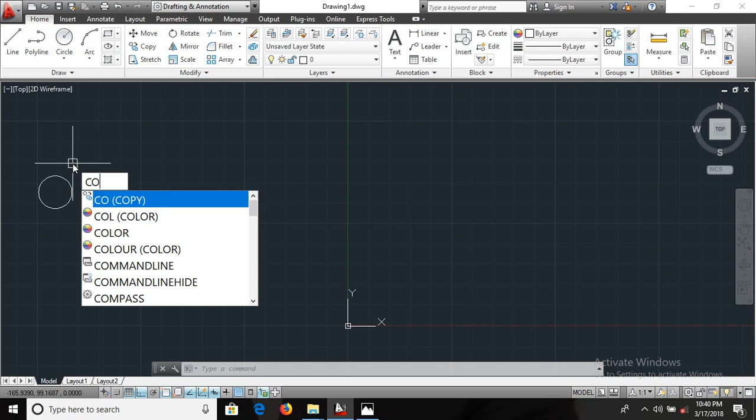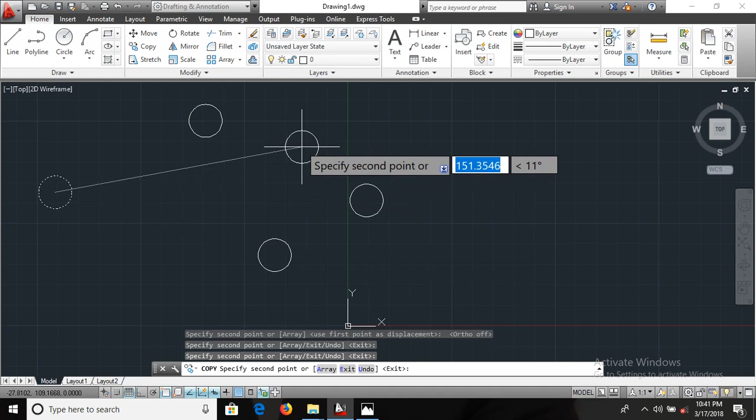The same circle I want to take a copy of. How do I take a copy? That's very simple. I'm using the copy command, cp command, or we can use co enter also, no problem at all. I'm selecting this command and enter. Now it's asking the base point, so I need to specify the base point, meaning from where we are taking the copy. From this point I want to take a copy, so I'm clicking that point. After that, where I want to take this, I'm turning off F8. So now ortho is off, and I'm clicking this point. Then the object is going to copy onto the location where you clicked. This is one way we take the copy, or otherwise we can do it by a different method also.

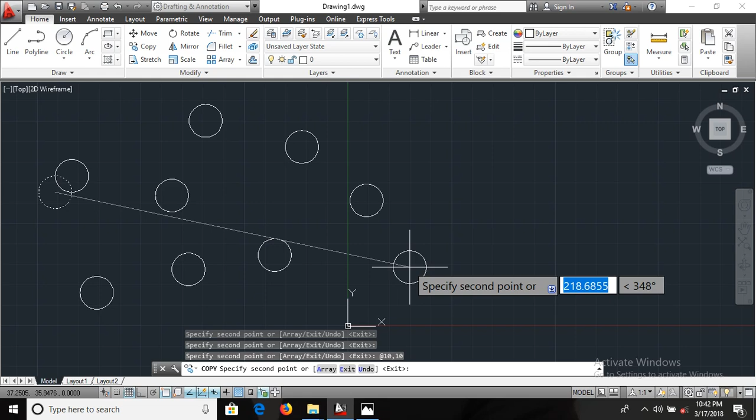We can use coordinate values also, either relative, polar, or Cartesian. It doesn't matter, so I'm taking Cartesian now. For suppose I give 10 comma 10. From that origin it takes 10 comma 10, and the circle will go and copy at that location. I just click enter, then we can observe there. That's very simple to do. This is the way we take the copy command.

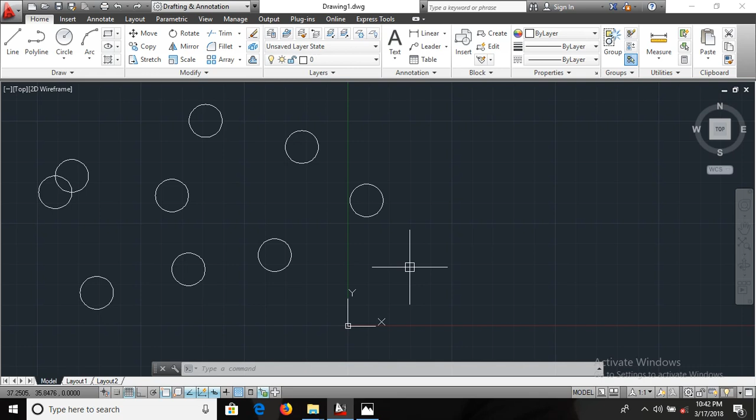And we have another thing also, move. What is the exact meaning of the move command here? That's very simple, friend. So m enter, the same thing I use for copy, and the same way we can do move also. But move is nothing but cut, so it's moving that object from that location to another location. I'll show it to you with an example.

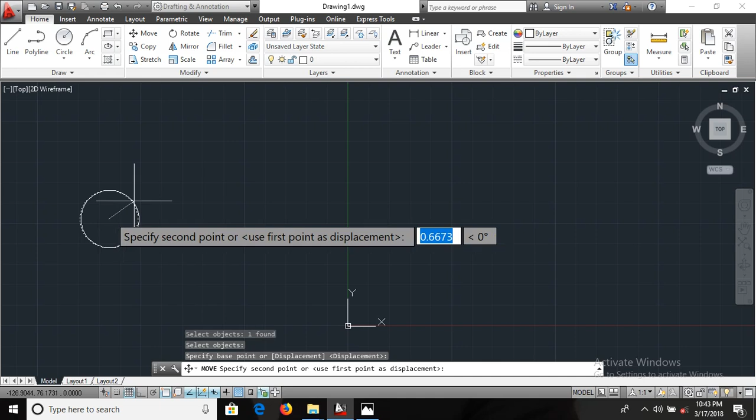I make a circle here, like this. I want to move this circle from this location to another location. So how do we do that? We take the command that is move, and I'm selecting this object and enter, and specify the base point here, and I'm moving this. Yes, it's possible to move. Click there, then the move command is done. So this is called move.

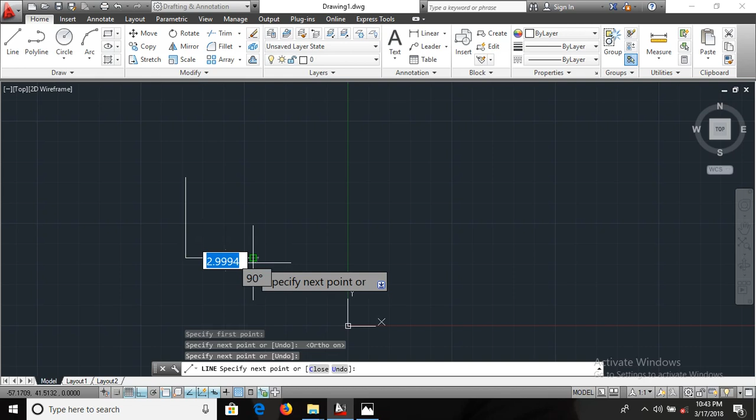I'm going to discuss the next command, which is called mirror. For suppose I'm drawing a line like this. Now I want to mirror this object onto another location, so mi enter, and I'm selecting this object, enter, and specify the first point of the mirror line, specify the second point of the mirror line. What happens, friends? Now the mirror is here, and that's the reason this object is automatically mirroring on this side.

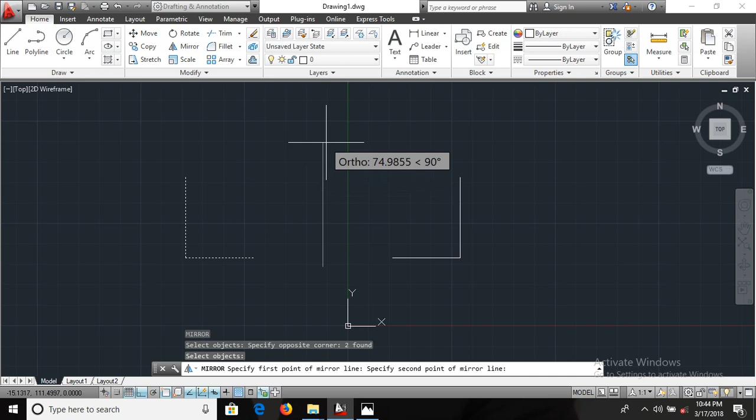Now I do it once again. I use mirror, enter, specify the first point, specify the second point, yes, no. Now you can observe. So this is called mirror, friends. Now let us see the next one.

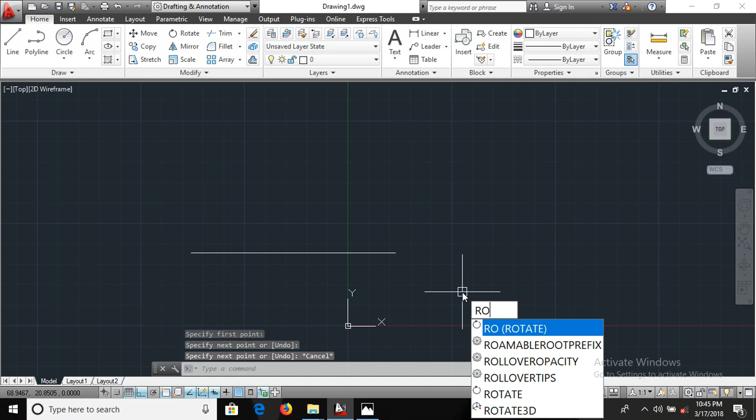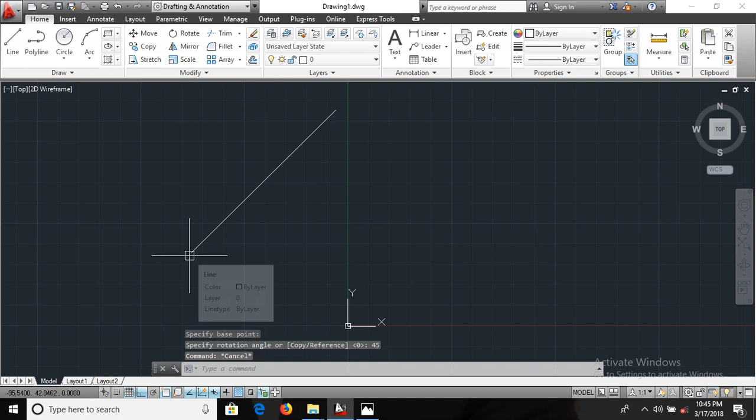Another command I'm going to discuss with you is rotate. L enter, I take a line here. This line I want to rotate by 45 degrees of angle, so it's possible. RO enter, select this object, enter, select this object, then after the base point, from this base point I want to take 45 degrees of angle. So I give the base point here and 45 degrees. Then it rotates by 45 degrees of angle.

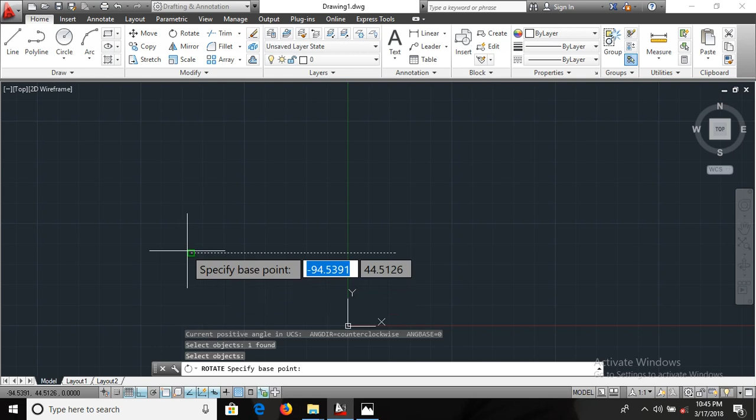But observe, friends, I don't want to do it just that way. I want this object, and I also want to copy this object within a 45 degree rotation. How is it possible? Very simple. I'll do that: RO enter, select this, enter, base point, and here, friends, I'm using the copy reference, so that's why copy.

Now you can see this 45 degrees of angle. The object is stable over here and it's taking 45 degrees of angle. So this is very simple, right? This is what we are doing with the rotate option here.

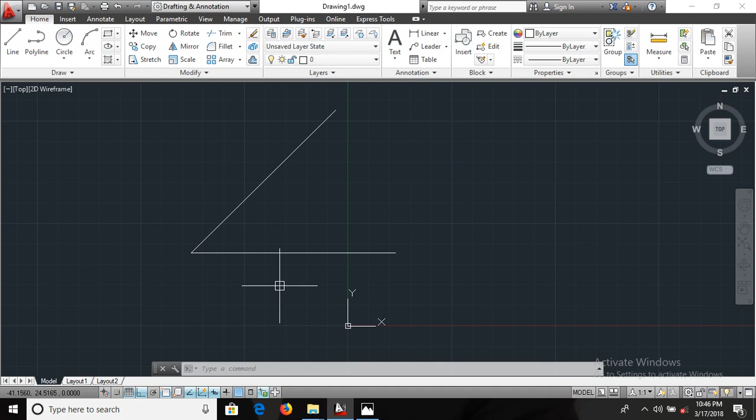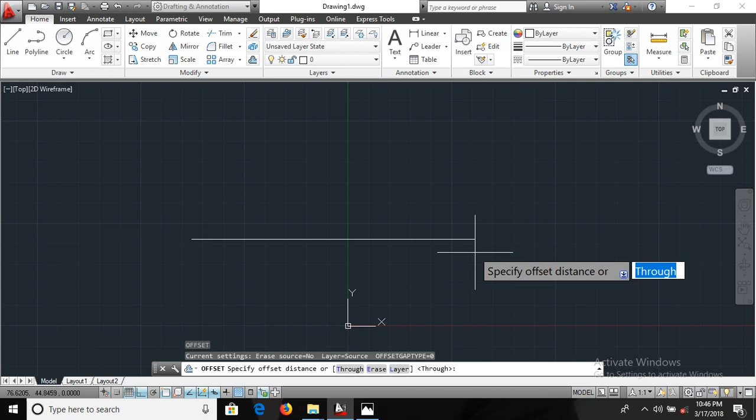Next I'll explain some more commands. For example, if I want to do something like offset, let's take a line first. Now I'm using the offset command. Offset means we are taking parallel lines or concentric circles. So for that we type O enter, and it asks for the offset distance. The offset distance I'm going to take is 5.

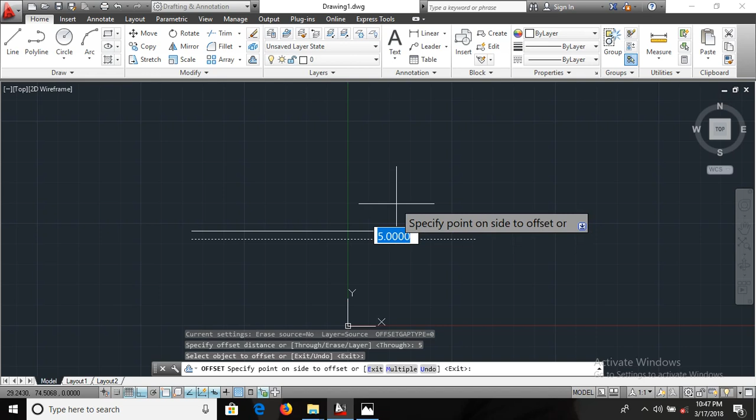Enter, select this object and specify a point on the side to offset. So offset means I type O enter, and it asks to specify the offset distance. After giving the distance, I need to decide where to take the parallel line. If I want the parallel line on this side, I have to click on this side. If I want it on the other side, I click there.

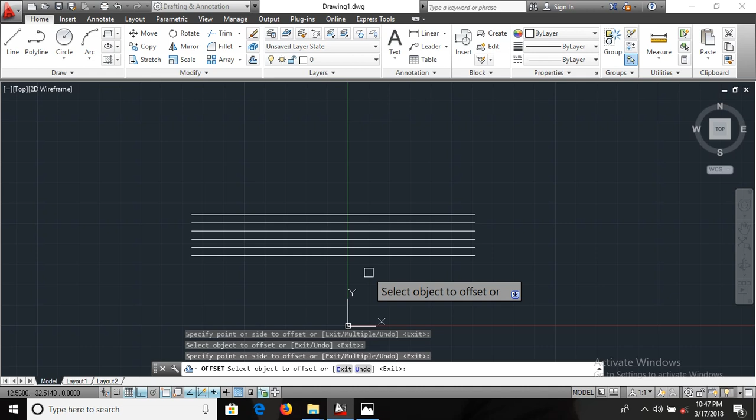Observe friends, the next thing I'm going to discuss is scale. So I'm explaining about scale now. I'm taking a line that is 100 units. So I draw a line segment with 100 distance, but I want to scale this 100 distance line by 2. So then what happens?

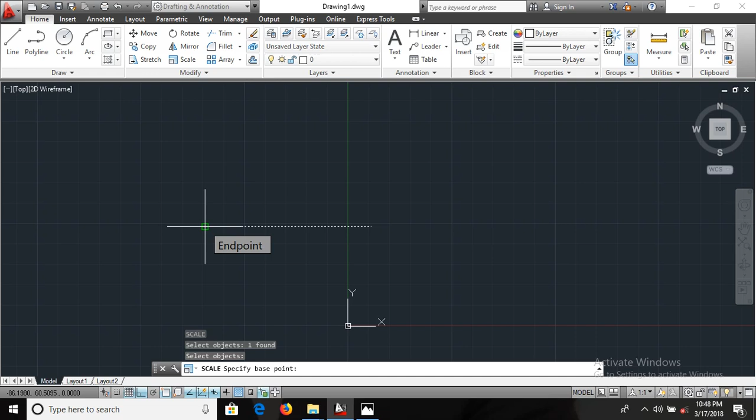SC enter, select this object, enter, and it asks for the base point. So when you specify the base point over here and increase any scale, that will happen onto this side. It means when you select the base point on this side, automatically the scale will happen on this side.

I select this one and do the scale. The scale is given as 1.5 suppose, and enter. Then the scale happens. Is it clear now? Yes. So now we can see the scale has happened on this side. Why? Because of the base point we defined on this side. So the scale will happen onto whichever side the base point is defined. This is the exact meaning of the scale command.

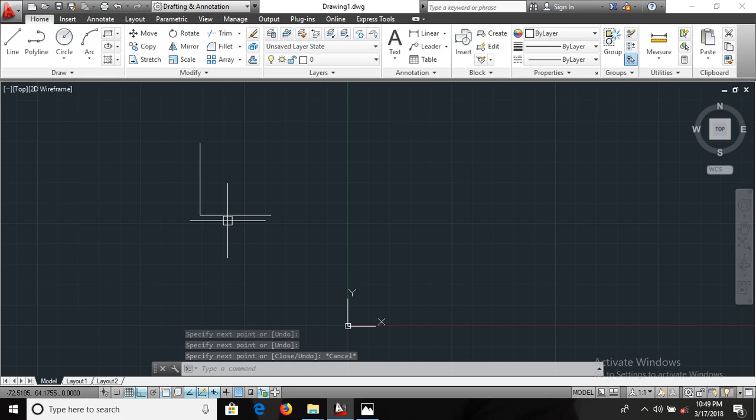Next we are going to discuss fillet. How do we do that? See, I have a line like this. In this corner I want to take the fillet. Suppose I want a fillet of 5, then: F enter, F for fillet, R for radius. Now it asks the fillet radius, that is 5. Enter. Select this object and select the second object. Now the radius corner comes out here.

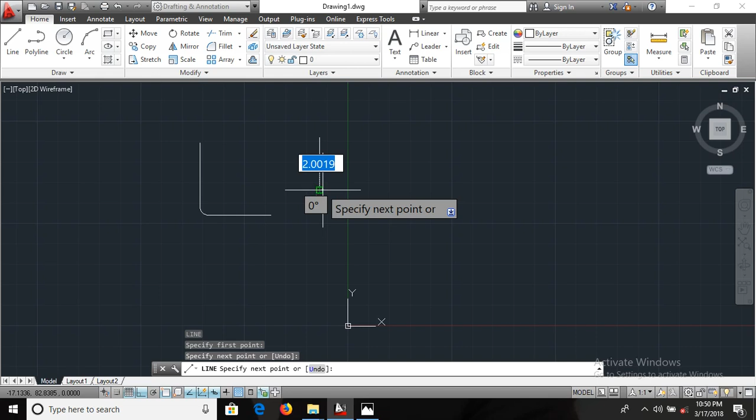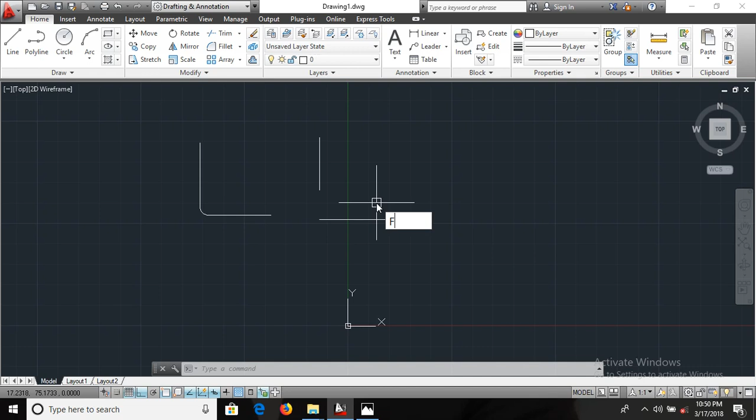But we can see, friends, we have another option. L enter here, a line is taken. This is a way I'm taking another line over here. Here we can see these two lines I want to connect together. How do we do that? It's very simple: type F enter, but I'm not specifying the radius, I'm just selecting this object and selecting this object. Then automatically it will happen.